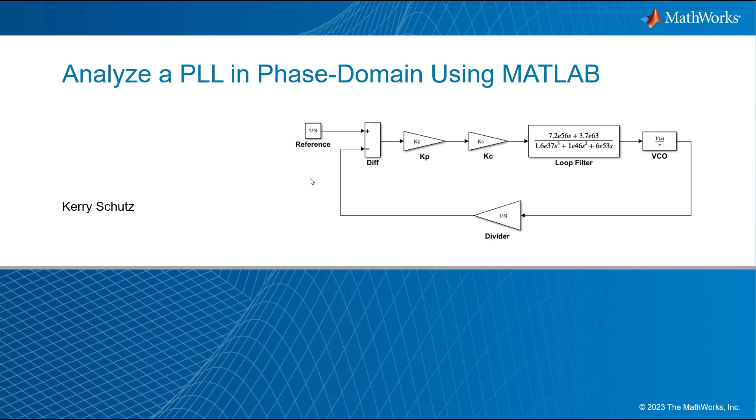Hello, this is Kerry Schutz from MathWorks, and in this video I'm going to talk about and show how to analyze a PLL in the phase domain using MATLAB. And it's actually a phase domain PLL, which we see here on my opening slide. Now, of course, it looks very much, and it's really indistinguishable from any feedback control system, but it just so happens to represent a PLL, in particular a charge pump PLL.

Now, the phase domain modeling concept is nothing new. The phase domain models are essentially linear models that treat the phase lock loop as a control system, a feedback control system. The reference input and the VCO output both have units of phase in a phase domain model. That would be the input and output are either in units of radians or degrees.

And phase domain PLL models assume an initial locked state. And that means essentially that the VCO frequency is locked already to n times the reference frequency. And now in such a phase domain model, it's only the phase of the reference that's going to vary, not the frequency. And we're going to call that variation theta ref of s, or theta ref of t, depending on whether we're working in the Laplace domain or in the time domain.

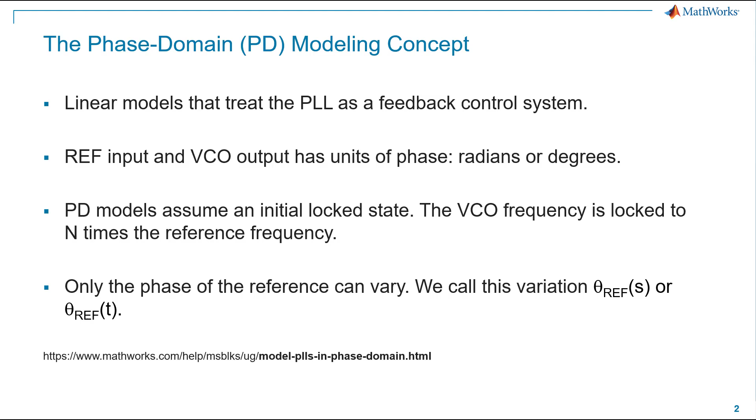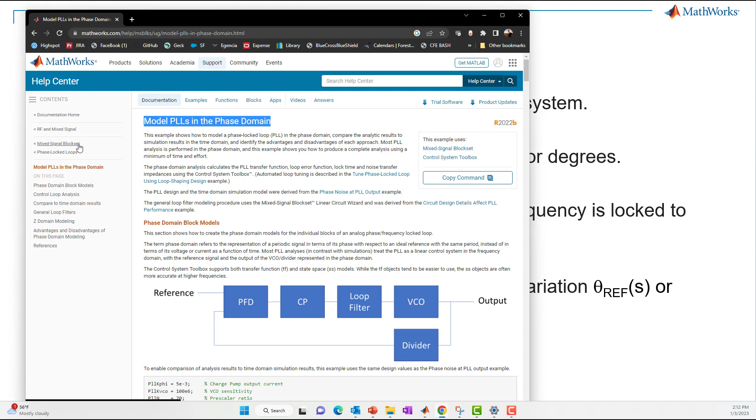There is also, I list down here, a link in our MathWorks doc that talks more about phase domain models, and I'll just go over here and call that page up. You can see its name, the link to it in our doc, and then what it says about modeling PLLs in the phase domain there. This just so happens to come from the Mixed-Signal Blockset portion of the MathWorks documentation, but you won't need the Mixed-Signal Blockset in order to look at this doc. You just need to go to this link, this URL.

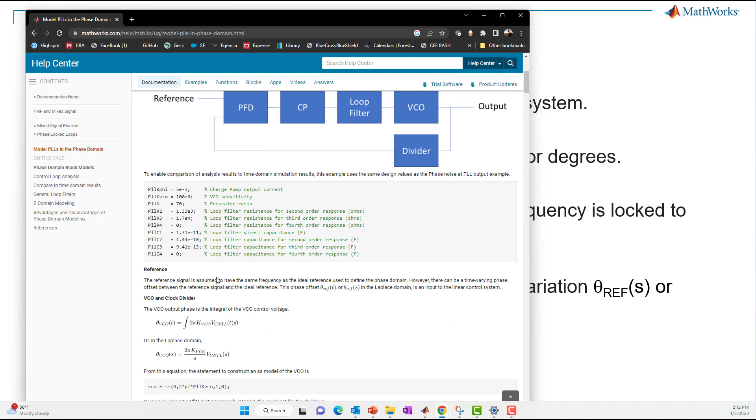And in there, it'll talk about, well, the term phase domain refers to representations of a periodic signal in terms of its phase with respect to an ideal reference with the same period. And it goes through lots of details of the modeling aspects here below. I won't go through that. I'm going to give you my own take and version of that here in this video. And pictorially, it might go something like this without getting into all the math.

A time domain model here we have at the top. It shows the different building blocks of a charge pump PLL. We've got a phase frequency detector, and on this icon you have some representation of how that circuit is actually built in practice. You see a dual D flip-flop structure with feedback loops through a gate to a reset. For the charge pump, we see current sources. It might be NMOS and PMOS, and we've got switches, which would be transistors in practice as well.

We've got a loop filter. It could be active or passive. We're showing a third order passive filter here composed of R's and C's, or if it was active, it'd have op amps as well. The VCO could be like an LC tank tuned VCO. It could be a ring oscillator VCO. And underneath all these blocks, we've got some type of detailed behavioral representation of those circuits, including the divider, which would be some type of a digital counter flip-flop implementation. You can go to quite a bit of trouble, even if it's not the actual silicon. You can have very, very detailed models of these in your simulation environment.

This screenshot just so happens to come from Mixed-Signal Blockset, but it could come from a textbook or any other environment. In any case, you see that the input is a square wave of some frequency, and the output is n times that frequency. But again, it's a voltage versus time periodic waveform.

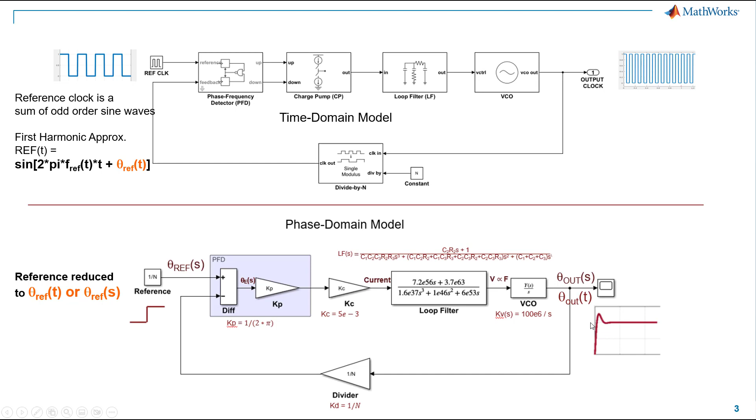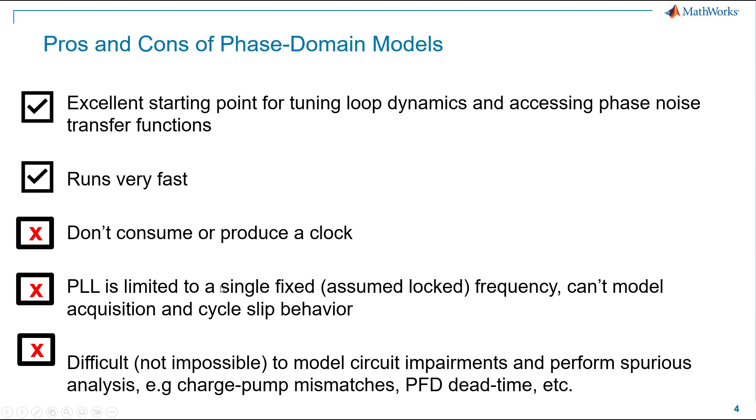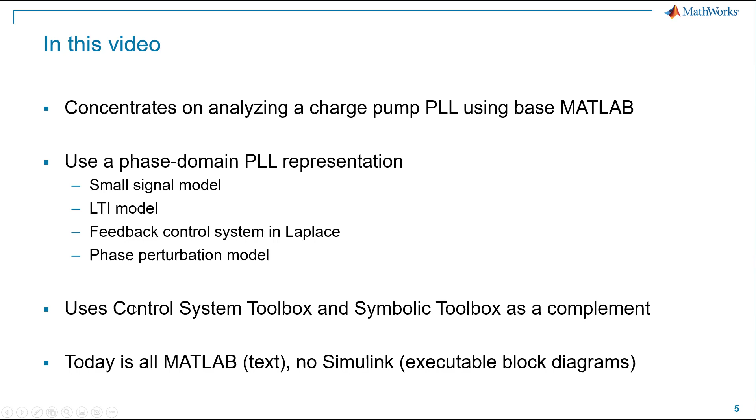So in this video, I'm going to concentrate on analyzing a charge pump PLL, and I'll be using only really base MATLAB features. However, I will use Control System Toolbox and maybe Symbolic Toolbox, we'll see, as just a reference point. We won't be leveraging them in any intense way, but we will be using Control System Toolbox since it's typically a tool at our disposal. It's something that many of us have grown to use and trust over the years. So I'm going to compare my base MATLAB analysis method with the Control System Toolbox method. All right, so let's go ahead and jump over into the tools.

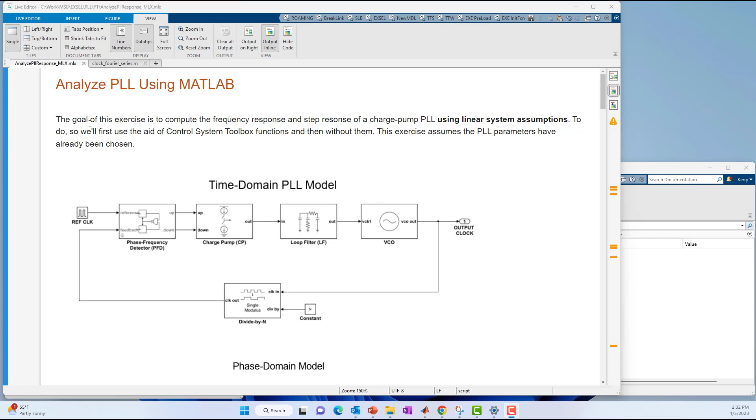Okay, so now we are over in MATLAB. In particular, from MATLAB, we have opened up our live editor. Within live editor, I've got my live script, which is doing my PLL analysis using MATLAB. The goal of this exercise is to compute the frequency response and the step response of our charge pump PLL phase domain model using these linear assumptions. To do so, we're first going to use the aid of Control System Toolbox functions, and then we're going to do the same thing except without using those Control System Toolbox functions.

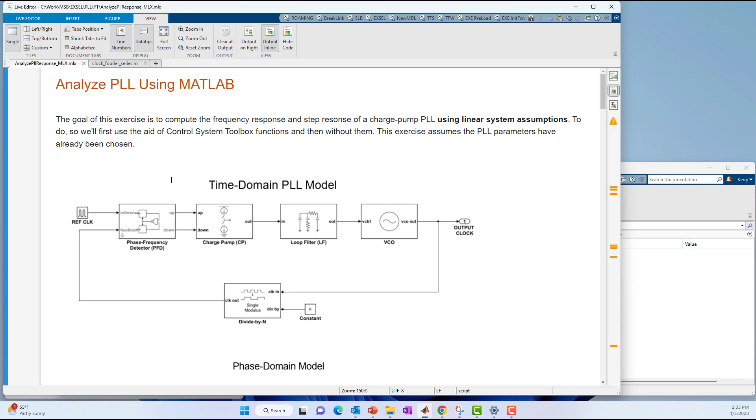This exercise does assume that the PLL parameters have already been chosen/designed. So all we're doing is, shall we say, putting them in the model. These are the same screen captures you saw in our PowerPoint presentation earlier. The only thing I'll note is that we are again deriving the closed loop transfer function of the PLL, theta out of S over theta ref of S. That's our phase transfer function. All right, so let's start with number one, which is computing and plotting the frequency response using Control System Toolbox functions.

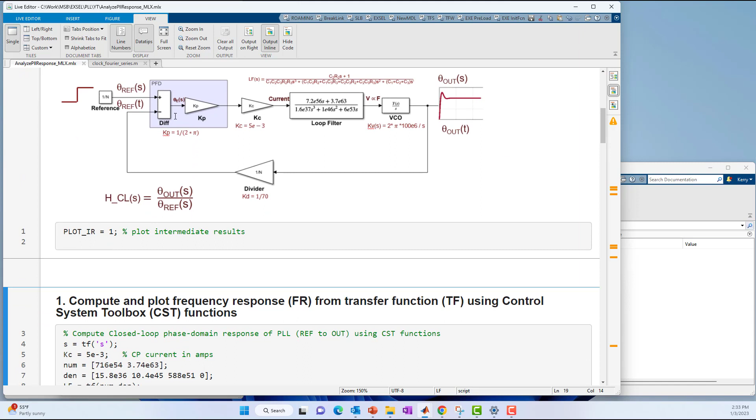Okay, so let's just start using those functions. In Control System Toolbox, you'll find functions like TF. Here's another use of TF. Here's a use of the feedback function and the Bode function. So those are the Control System Toolbox functions we're using, along with the step function. So all of those we're leveraging from Control System Toolbox to help us model this PLL in the phase domain. So you'll see things like KP, KC, LF for loop filter, VCO, and divider. So here we go. We've got our charge pump current. The charge pump model then reduces to just a single scalar, our gain of 5e-3 or 5 milliamps.

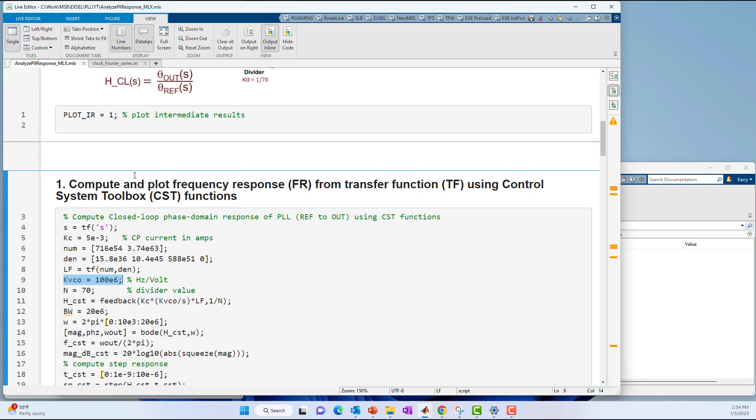The numerator and denominator of our loop filter based on the architecture and the components that we've chosen are as follows. And so we create a loop filter Control System Toolbox transfer function object reflecting that. This is our VCO gain in hertz per volt. You notice you don't see a phase detector gain of 1 over 2 pi here because the gain of the phase detector and the gain of the VCO cancel out. There's a 1 over 2 pi factor in the phase detector. There's a 2 pi factor in the VCO, so those just kind of self cancel out.

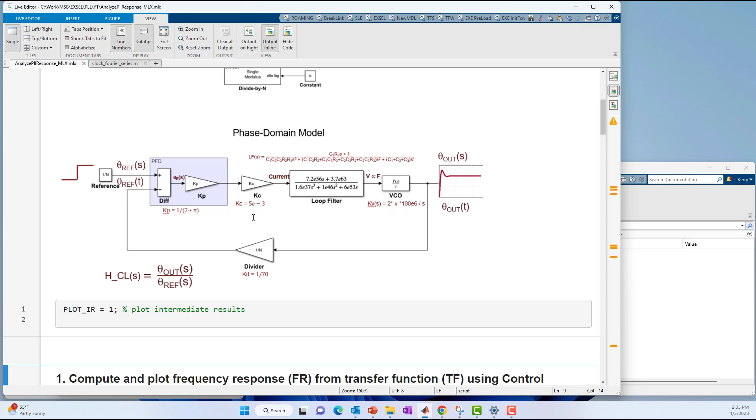And now we're left with each of the gains for each of the constituent blocks. We've connected them together via a feedback function. So we've got Kc times Kvco over S times the loop filter, and then the feedback gain of 1 over N. And then we've got a Control System Toolbox closed loop representation. I'm calling it H_CST, for H closed loop transfer function and CST for Control System Toolbox.

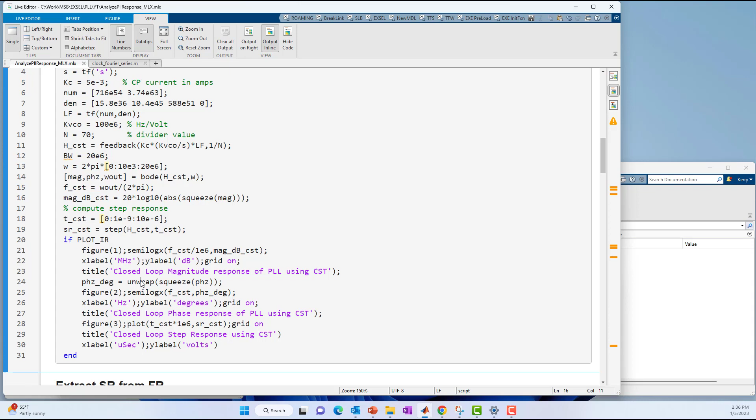And that's pretty much it for the entire transfer function of the PLL in the Laplacian domain using Control System Toolbox. Now, in order to do analysis on that, typically I'll say the bandwidth I care about is maybe 20 megahertz in radians per second. That would be times 2 pi. And then I use the Bode function to tease out the respective magnitude and phase responses. And then I just compute magnitude here, 20 log10 absolute value, and the phase already came out. I just do a simple unwrap here below and plot those out along with the step response.

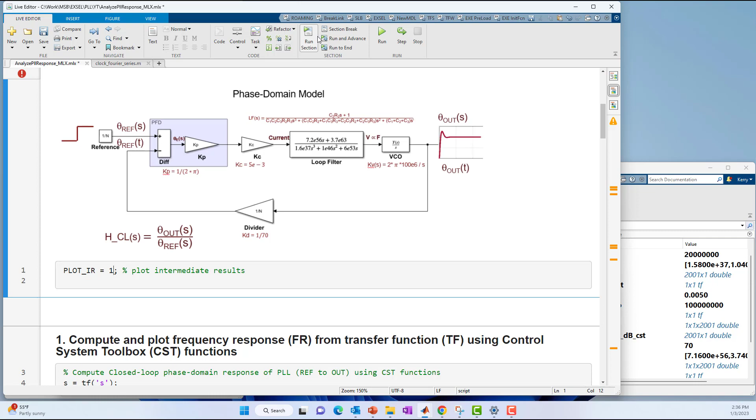So I apply step and Bode to this derived H_CST, the closed loop phase transfer function, plot those out, and I'll do that by running this section of code. In Live Editor, I'll just hit run section. And when I do that, I get an error. That's because I didn't run the first section. Let's run the first section first to define that variable, run and advance. Then I'll run the second section, run section. And now here we go.

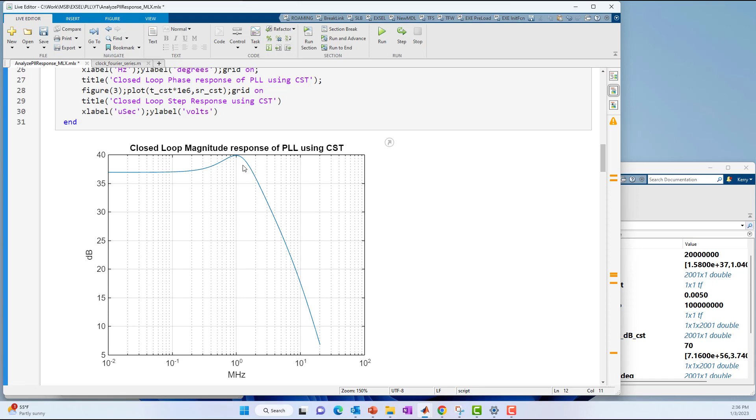So now we've got the magnitude response closed loop of the PLL. You see it's got a peak of about 3 or 4 dB of peaking around 1 megahertz. And then we've got the phase response of the PLL, and we have the step response where we see it settles around 70, which just happens to be the divide factor in the PLL.

So that's an easy way to get a gut feel if your PLL is settling at the right value. For an integer-N PLL, at steady state for a phase domain model, it should settle at the divider factor, assuming you're putting a unit step in. Okay, so that all seems to make reasonable sense.

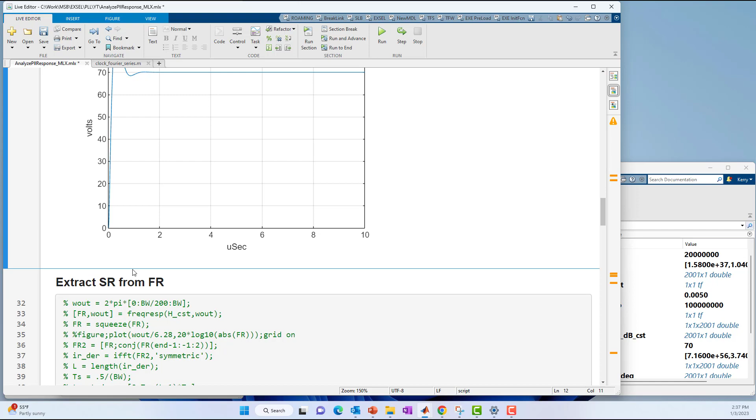Now, what if we wanted to do the same thing without leveraging those transfer function objects and step response functions and feedback functions? How would we do that? Well, the answer boils down to really 2 things in base MATLAB: polynomial multiplication in Laplace and inverse FFTs. So we're going to leverage both of those capabilities of base MATLAB to do the same type of control systems analysis.

First of all, I'm going to create some variables here. In other words, how long am I interested in analyzing the step response over? I'm just going to initially choose 10 microseconds. What bandwidth am I interested in? I'm going to say a frequency range of interest similar to above is 20 megahertz. But if I'm going to analyze something over 20 megahertz and do any type of discrete time analysis, like the FFT, I'm going to need to pick a sample rate.

Well, by Nyquist theory, you'd have to choose at least 2 times 20 megahertz, but I'm going to be very, very conservative and go much faster. I'm going to say 10 times the bandwidth is going to be my sample rate. Again, you can play with that and see what the side effects or trade-offs of a faster or slower sample rate, or oversampling factor of 10, are.

So using that FS, that corresponds to a sample period of 1 over FS. And that also corresponds to this many number of points in my analysis. Again, we're assuming we're doing a fixed step discrete time analysis. So that would be the length of the simulation times the sample rate. I haven't run this yet, but if I run it, I can find out real quick that the number of points is around 2,000.

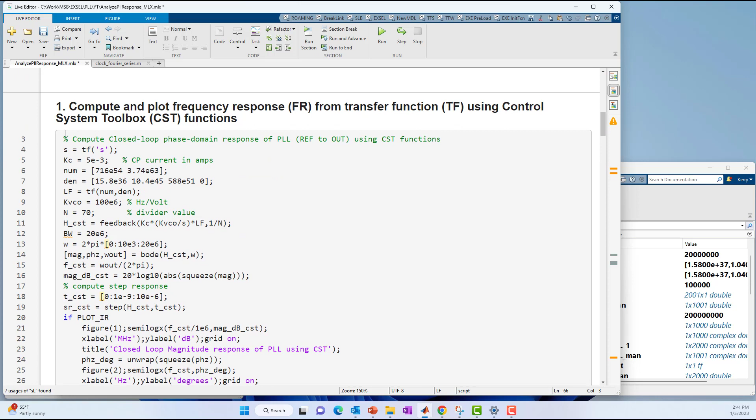All right, and then I create a complex frequency vector, which is the Laplacian S, SL, which is j times 2 times pi times our frequency vector. Because the frequency vector is real, SL is complex, the complex S variable. So note this is different. This is just a complex MATLAB variable. This is not the same thing as above, where I created this sort of symbolic Control System Toolbox S variable up here.

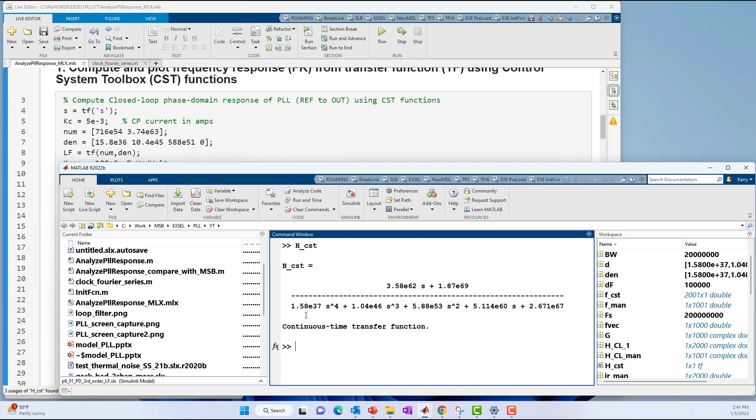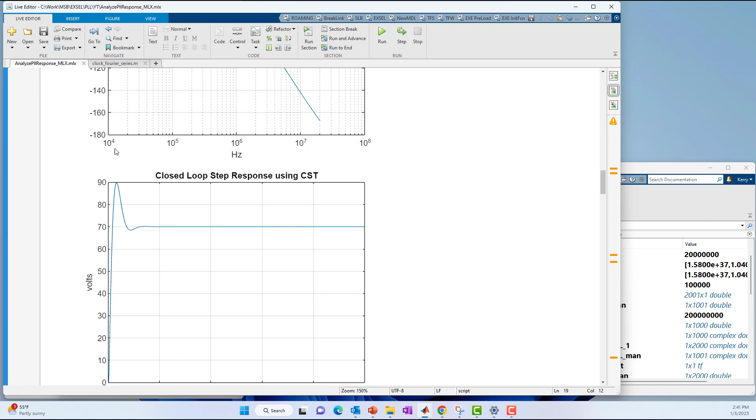Okay, so if I were to look at H_CST, which I did earlier, I just put this in MATLAB. H_CST is this symbolic-ish, not Symbolic Toolbox, but symbolic-ish Control System Toolbox transfer function of the PLL, the closed loop transfer function. Now, this is going to be very different from what I did here below, where I created this complex frequency vector, SL. SL is 1,000 points long.

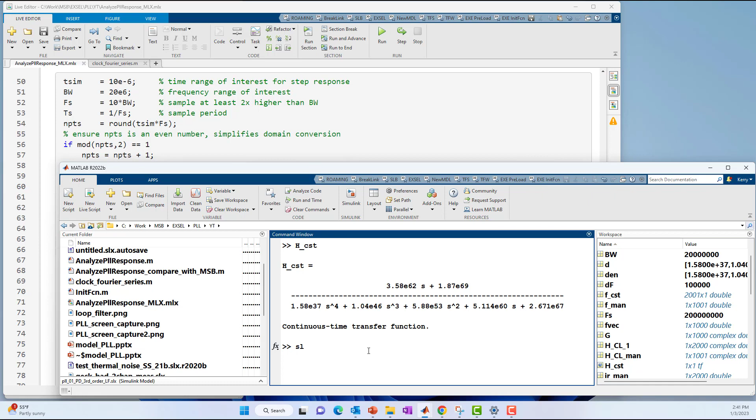And if I were to just type it out and let it run over my screen here, I'll do it transposed so we can see it. We can see that it's a bunch of complex frequency values. Okay, it's not symbolic.

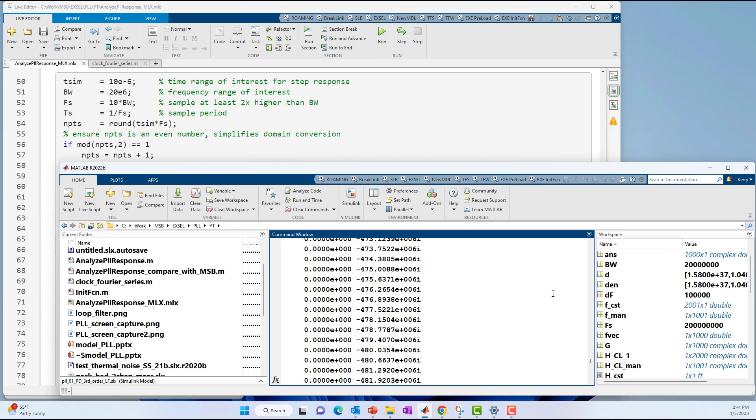So now, using that complex frequency vector SL, I'm going to compute the responses by using polynomial multiplication of each of the individual blocks. For instance, starting with the loop filter, I'm going to take the numerator and denominator coefficients, again redefined right here, and I'm going to be multiplying that numerator and denominator, right? I'm going to do the same thing I just showed here using Control System Toolbox, this one right here. I'm going to essentially do this, except I'm doing it empirically.

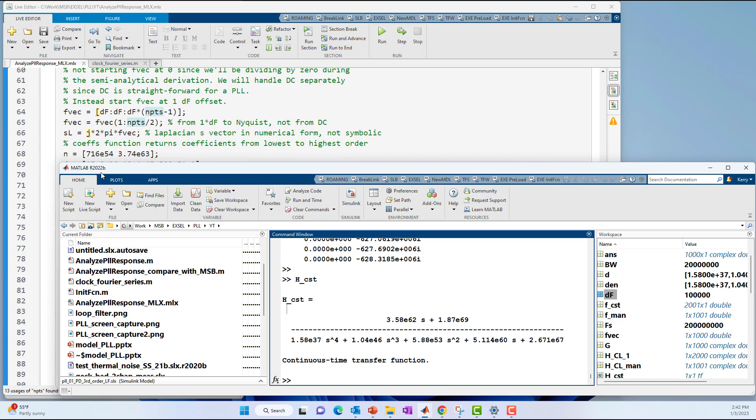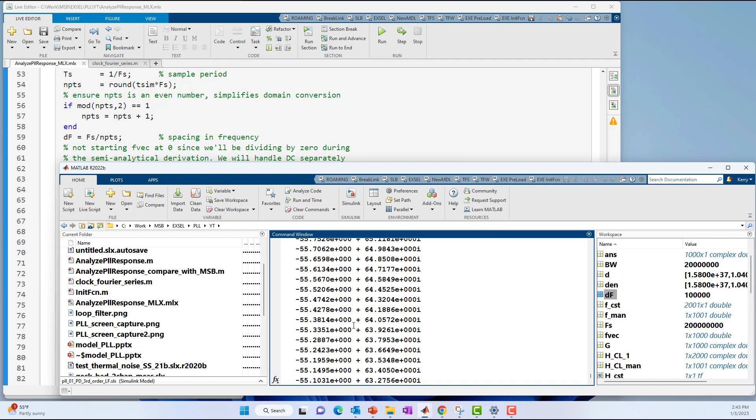I'm going to substitute in SL right here, right here, right here, right here, and right here, okay? So I'm doing that in this transfer function you see right here below. Of course, this is for the closed loop. If I were to do it just for the loop filter, it would be a little different. It would be Z underscore LF. I'll just do that so I'm speaking consistently, Z underscore LF. This is the loop filter transfer function in empirical terms, okay? All right, so we've got that.

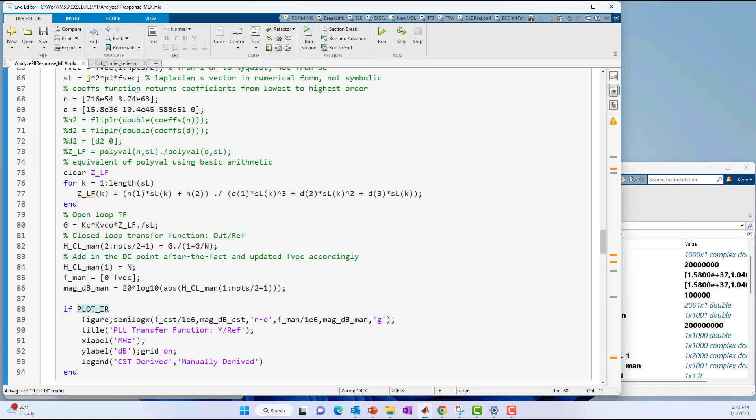Now we've also got the open loop transfer function of the PLL. We've got this KC charge pump times KVCO times Z underscore LF divided by S, okay? And likewise, we've got now finally the closed loop transfer function manually derived of the PLL. And now a little care must be taken. I'm going to insert the DC point manually. In my previous analysis, remember my frequency vector did not have DC in it. I skipped DC. So I'm going to reinsert DC here.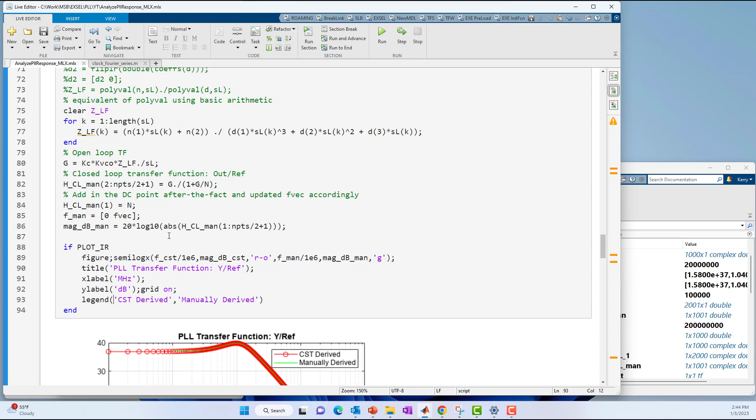The DC response is just in the divider factor. And then I reinsert a DC frequency value of 0 in the frequency vector, and I call that the manually derived closed loop response and the manually created frequency vector associated with that response. And then I take the magnitude of it, 20 log 10 absolute value, and then I plot that and compare it against the Control Systems Toolbox derived magnitude response. And you can see they overlay quite nicely here.

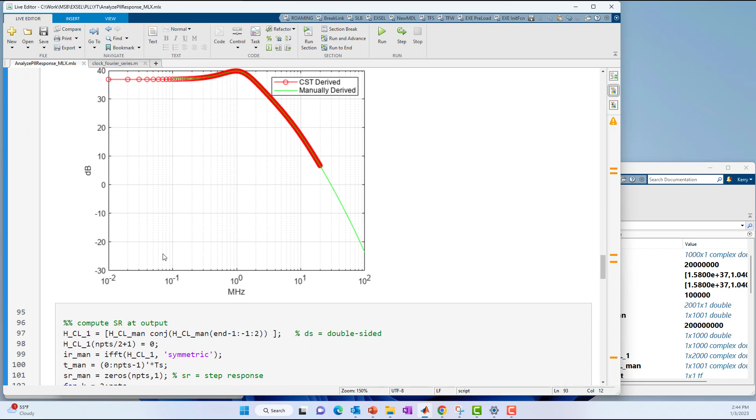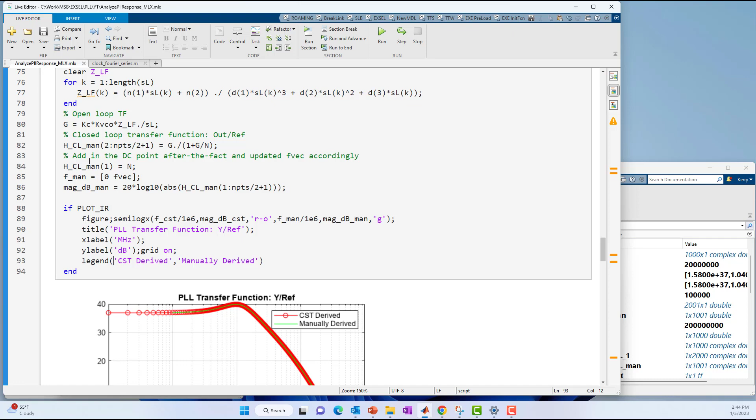Okay. Now, the next thing I want to do, I say, okay, that seems pretty good, but can I get the step response from this empirically created closed loop transfer function H underscore CL underscore man? And that's what I do in the next step. Now, how do you go from a frequency response to a step response? Well, one of the things we can do here is take advantage of the inverse FFT. But the inverse FFT really needs a full frequency spectrum, not 0 to Fs over 2, but really minus Fs over 2 to plus Fs over 2. And that's what I do in the first step here.

I create this conjugate symmetric spectrum. I take the positive 0 to Fs over 2 spectrum, I take the mirror image of it, conjugated, and that forms the rest of the frequency spectrum, the negative portion. But I'm taking special care here, once again, to omit the DC point. We only have one DC point, and it's at the first value of this vector. And I omit the Nyquist point, and that's the last point of H underscore CL underscore man. And so omitting those points, this becomes my conjugate symmetric frequency response or spectrum.

At that point, I can take the inverse FFT. I tell it it's symmetric, so I get a real impulse response output, manually derived. And I create a time vector, and then I can either plot out the impulse response, or I can integrate it, do a cumulative sum on it, to form the step response. And then I plot that out, and that's what we see below here. Now, likewise, I can compare all these and plot them on top of each other, and there's a final section in here, right here, which does that.

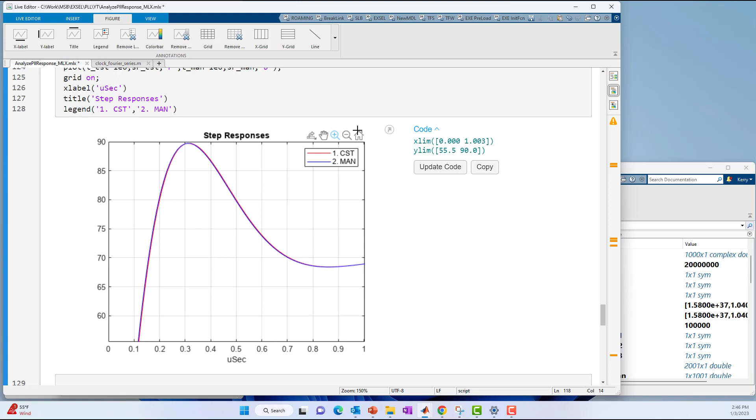Okay, I hope that was helpful. This is, again, my video attempt at explaining phase domain models and how you would model them using MATLAB. In future videos, I'm going to get into using Simulink for modeling phase domain and time domain models of PLLs, but that is for another day.